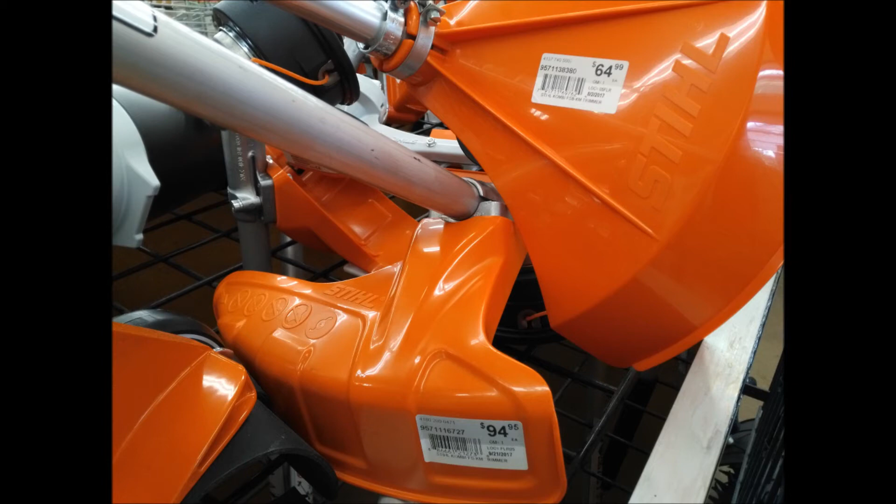Why is that? Well, the answer is it's all in the gearbox, and we're going to take a look at why. So here we have Echo's curved shaft trimmer gear case. Just take a second and look at it - you don't have to memorize anything, just get a feel for it. And then let's look at the straight shaft gear case. Instantly we see it's much more complex, and this is the reason why straight shaft trimmers are more expensive. It all comes down to the gearbox.

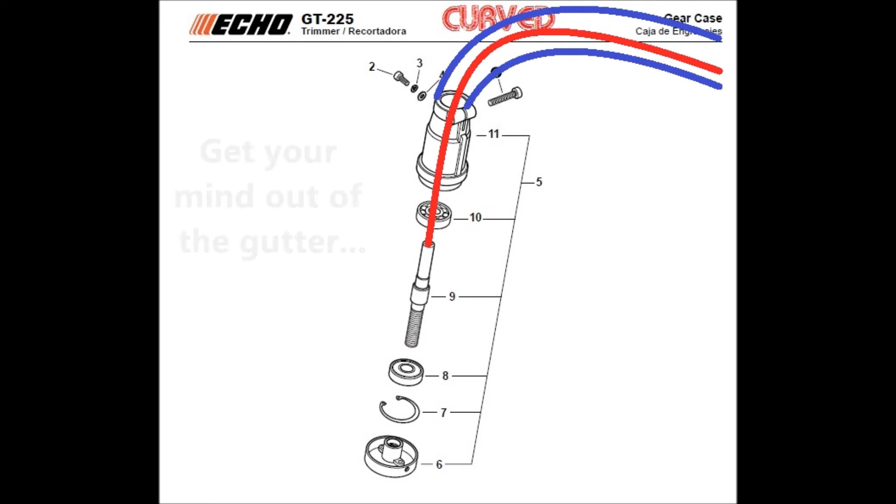When we look at our curved shaft trimmer head, let's imagine that those blue-purple lines are the shaft of the trimmer as you'd see it from the outside - what connects the engine to the handle to the throttle assembly all the way down to the trimmer head. The red line inside is the drive cable or drive shaft, and you can see it navigates the change in direction with this gentle curve of the shaft, then plugs right into the top of part number 9, which attaches to the string trimmer head. Very simple.

When we look at our straight shaft trimmer, we see something very different. We have 45 degrees worth of difference to make up in one transition. We don't have 1 or 2 feet of curved shaft to make our gentle turn - what we have to do is 45 degrees all at once. Again, our blue-purple lines represent the exterior shaft that connects the motor to the handle, to the throttle assembly, all the way down to the trimmer head. You'll see there's about 45 degrees of difference, give or take, that need to be made up for the transition between the trimmer head and the drive cable or drive shaft.

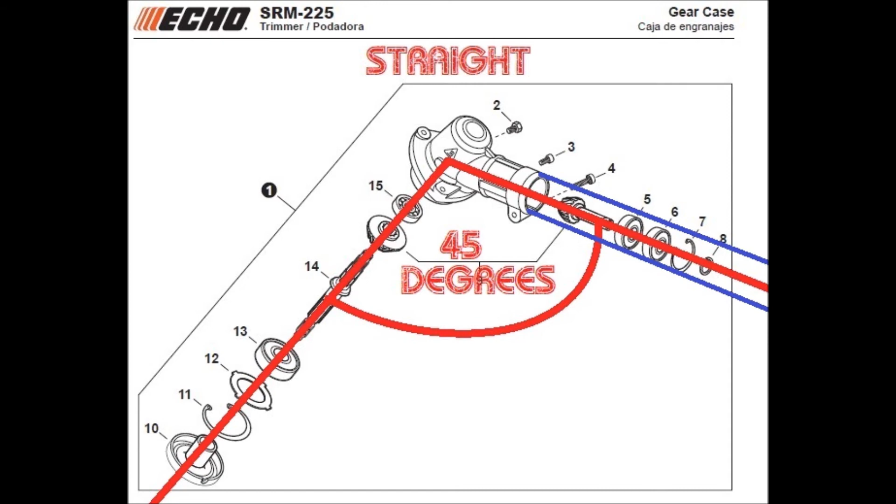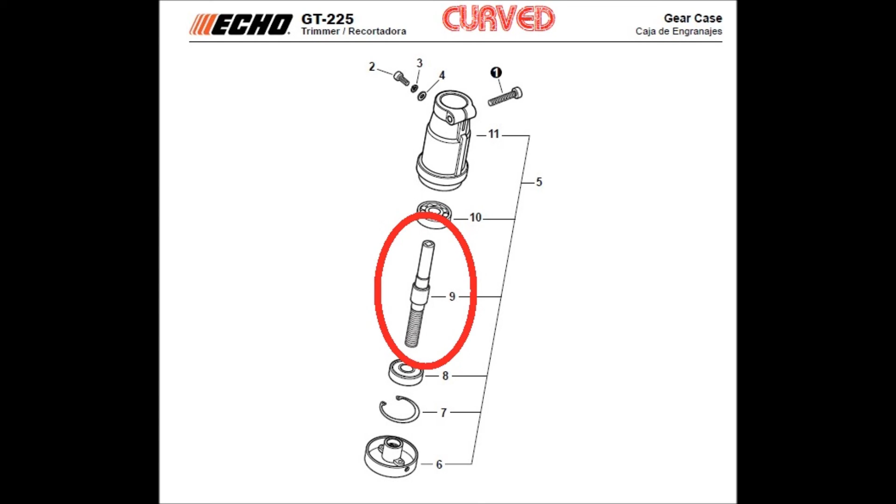We already talked about it, but the drive cable that runs from the engine just fits right into that square hole on top of part number 9. There's no gears involved here. The threading at the bottom of part number 9 screws right into the trimmer head, so there really isn't any disconnect between the drive cable or drive shaft and the trimmer head - it just connects.

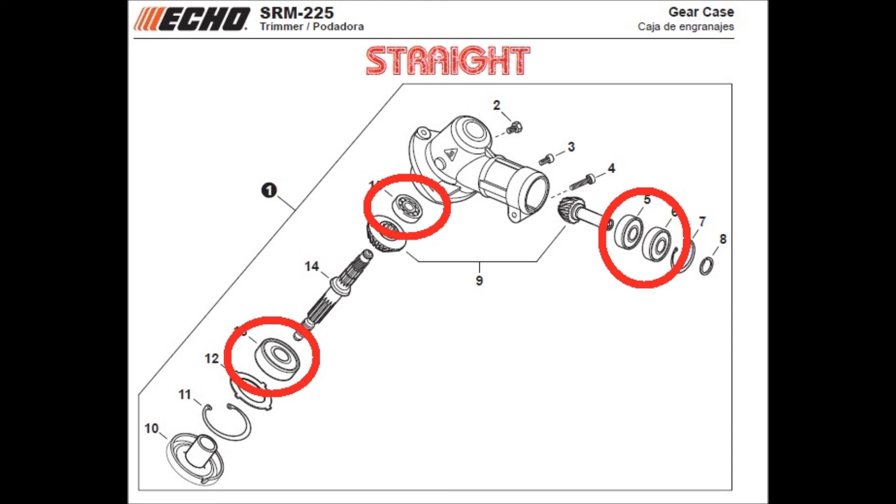Part number 14 is going to be closest to that part number 9 we just looked at. So part number 14 on the straight trimmer - take a look at all those teeth. Look at how complicated, how many steps there are in that. Again, much more expensive to make. What about bearings? Here in the straight shaft trimmer head, we see 4 bearings necessary to complete this transition, where the curved shaft trimmer only has 2 bearings - half as many.

And then the housing itself - take a look at how simplistic the curved gear case housing is. It's just cylindrical, that's pretty much all there is to it. Compared to the straight shaft trimmer, we see a lot more material. It's going to be heavier, and it's going to cost more to make.

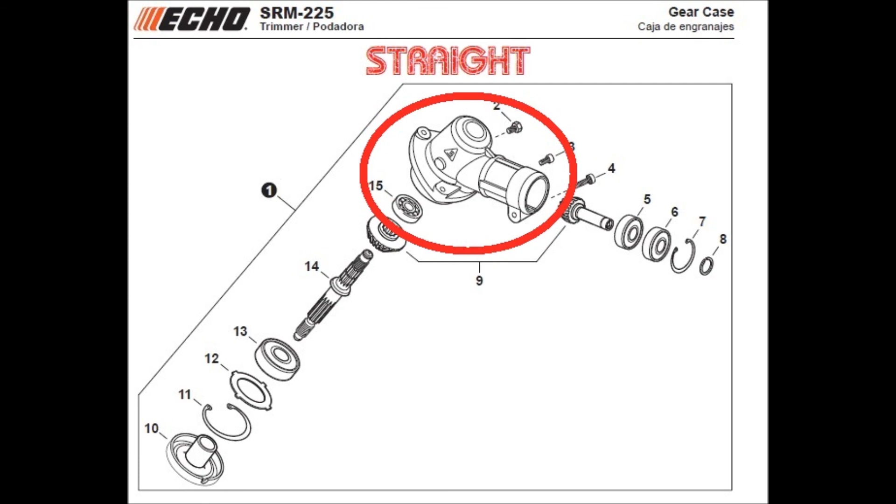So just a very quick video to try and help you understand. The next time you wonder, or the next time someone asks why a straight shaft trimmer is more expensive than a curved shaft trimmer, well now you know, and you can simply reply: it's all in the gearbox.